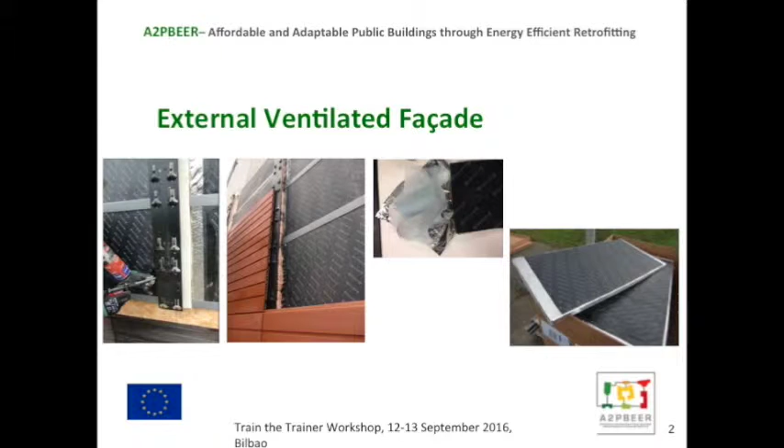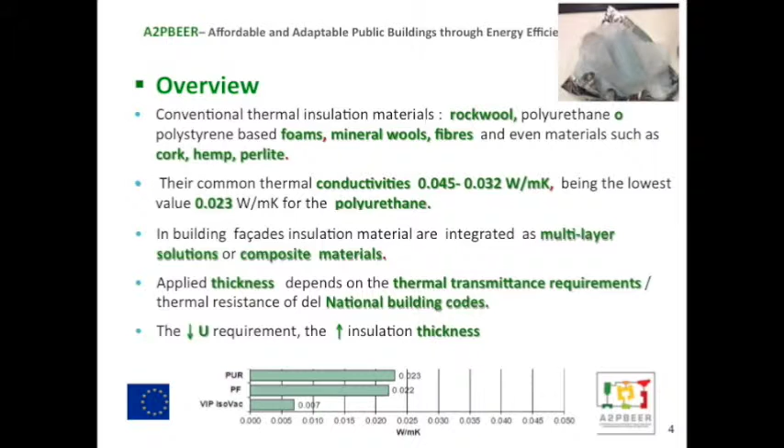So, as you know, there are several conventional insulation materials like rock wool, polyurethane, polystyrene, based on foam, mineral wools, fibers, and even materials such as cork, hemp, and perlite. There are huge materials to insulate your facade. But in this case, the thermal conductivities of these materials are between 0.045 to 0.032 watts per meter per Kelvin. So this material is not so good for the insulation. You need a big thickness to achieve the U value that the Commission is requesting nowadays.

In this graphic, you can see the value of the vacuum insulation panel compared to the rest. So it's a good material to use in the construction sector, but it's true that this material is not very common nowadays. So in order to reduce the U requirements, we need to increase the insulation thickness. And this is one of the challenges of this project, to reduce the thickness of the envelope.

We would like to share with you sentences that we have identified. The vacuum insulation panels can be defined as an evacuated foil-encapsulated open porous material, a high-performance thermal insulating material. This material is 3 to 6 times better than still air. And this vacuum is encapsulated with a microporous material. With this material, we can achieve high thermal resistance with a low thickness. But it's important to take into account also the cost of the material.

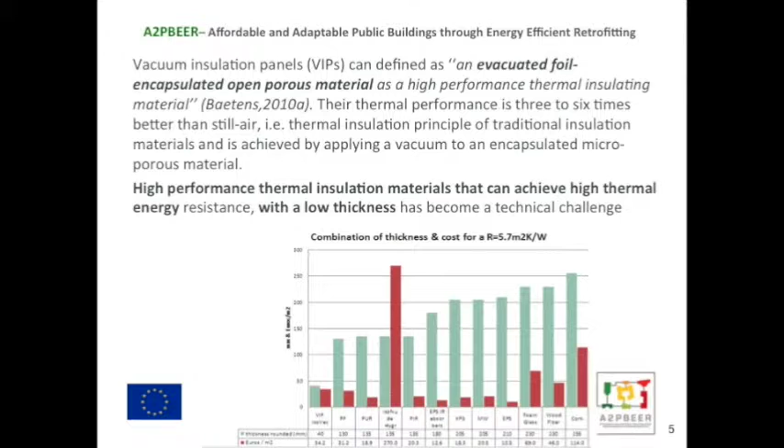So in this graphic, we can see the general prices of each of the insulation materials related to the thickness. So in the first, we can see the vacuum insulation panels. We don't have lists. No, okay, no problem. We can see in the first column the vacuum insulation panels, which is one of the most promising insulations for retrofitting.

So why have we developed these technologies and why do we want to reduce the thickness? Because with the approval of the EPBD recast by the Commission, the thickness of the insulation has almost doubled. So nowadays we have more strict requirements for the U value of the wall. So in this table, you have more or less the different U values of different countries, and the U values are between 0.18 and 0.4. So we need a good insulation to achieve these values.

This is the reason we selected the vacuum insulation panels as the best solution to retrofit buildings by the external facade or by the internal facade. And for example, in this table, you can see different thicknesses using different insulation: rock wool, EPS, super insulation, and vacuum insulation panels. So with the vacuum insulation panels, with 4 centimeters of this material, we achieve a U value of 0.16.

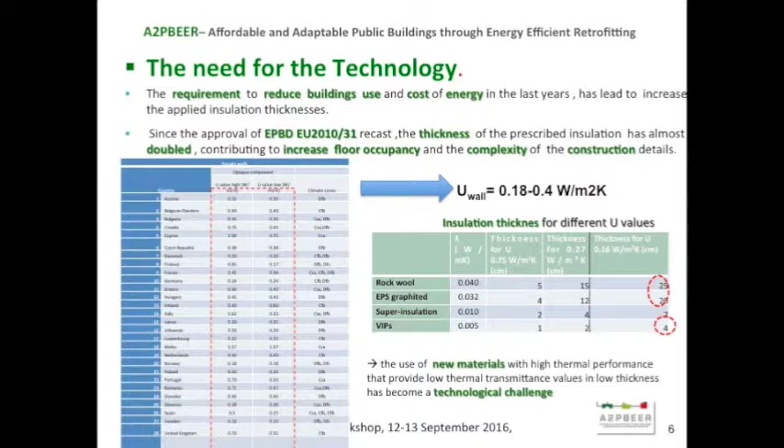Because nowadays the price of, for example, rock wool is more competitive, but you have to take into account not only the first investment. You have to take into account other kinds of things, the space that you save with this kind of solution. So for us, the use of this technology and material is a challenge. So we have achieved this challenge, and we think that we achieved the scope of the project.

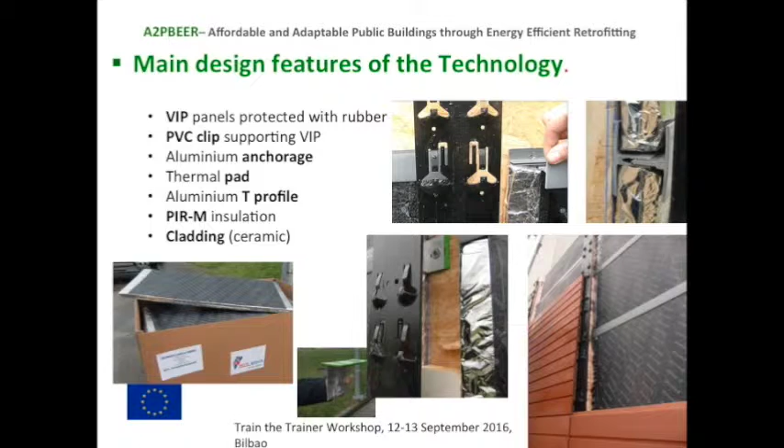The main design features of these technologies is a summary of the different components of the external facade. We have the VIP panels protected by rubber, because although all the components are commercially available, we have to improve all of them. The VIPs have been improved with this rubber. A new development by Bergamo, the PVC clips to support the vacuum insulation panels. We have the aluminium anchorage, thermal pad, aluminium T-profile, PIR insulation, and claddings.

So with these solutions, we can achieve a U value, as I said before, of 0.276, including, I don't remember the name, but the linear thermal transmittance of the linear thermal bridges and the punctual thermal transmittance of the 3D thermal bridges. I mean, in the construction wall, sometimes when you calculate the U value, people don't take into account the linear thermal transmittance and the punctual thermal transmittance. But in this project, we have taken into account everything. So this value could be better if you calculate without these kinds of thermal bridges.

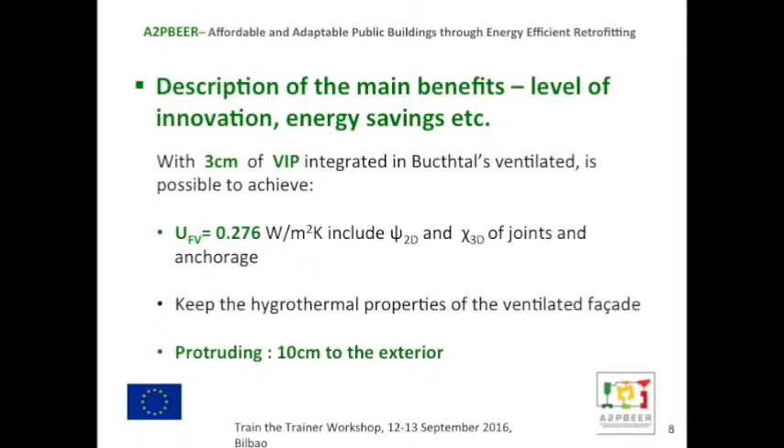We have kept the hygrothermal properties of the ventilated facade, and the final solution protrudes only 10 centimeters to the exterior. So the thickness of the total facade is not very big. So it's not a problem; for example, there are some streets with problems if you increase the facade by 20 or 30 centimeters. So with this solution, we can solve many problems.

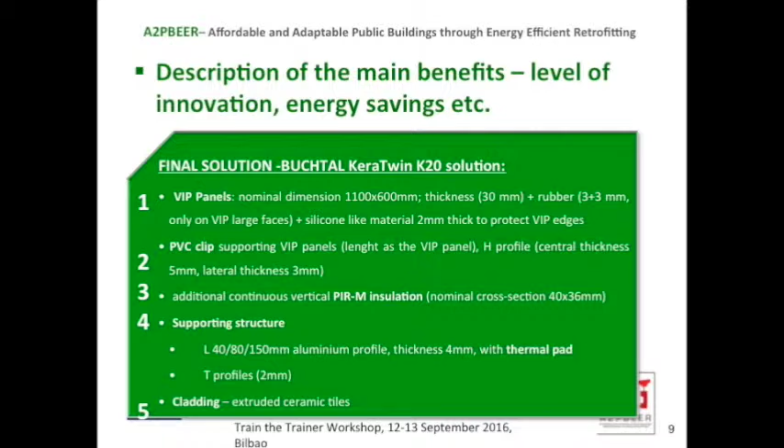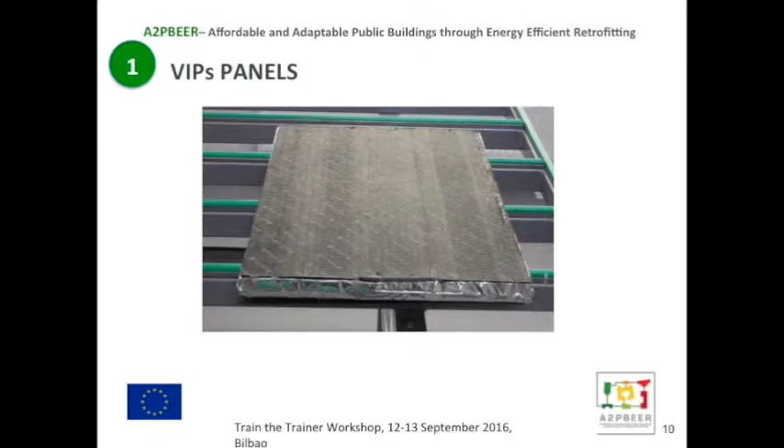So we have 5 components: the VIP panels with these dimensions, thickness, and protection, the PVC clips, the additional insulation material, because in some parts of the facade it's more cost effective to use the PIR material than the insulation, the supporting structure, aluminum profiles and T profiles, and the cladding. You can see the VIP panels with the rubber protection. The PVC clips.

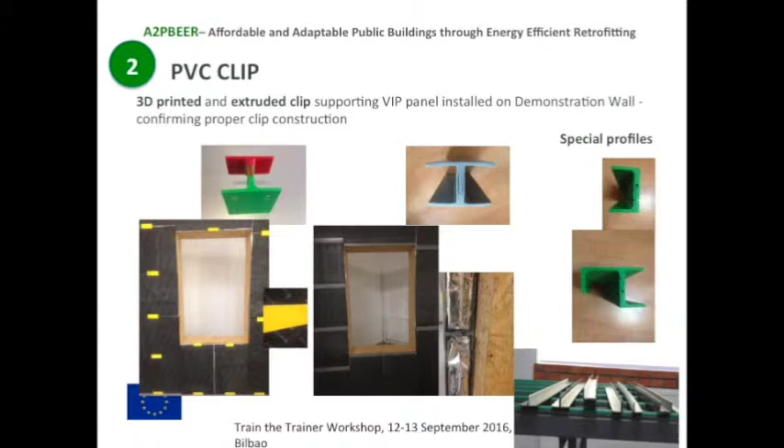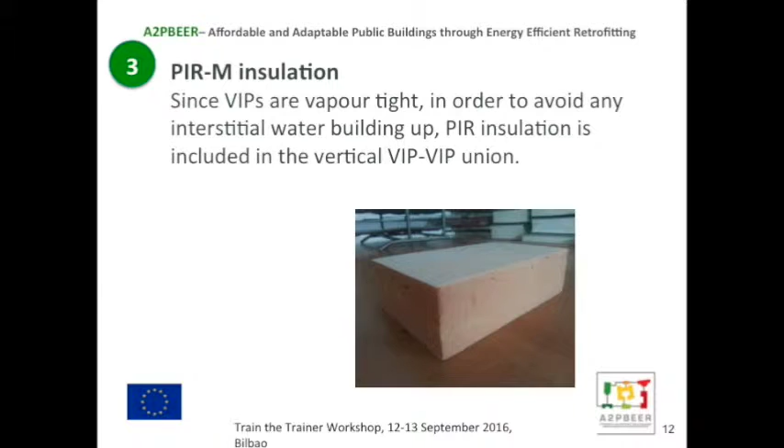The clips are 3D printed and extruded clips to support vacuum insulation panels on the demonstration wall, and Bergamo has developed different types of clips until achieving the best one. So now the clip has been improved, and now it is a good one. At the beginning we had some problems to support because of the wind and so on, and this is the reason we have installed the facade in a cubicle to test the mechanical condition of the whole facade, and to prove each element in real conditions before installing the final solution into the real demo buildings.

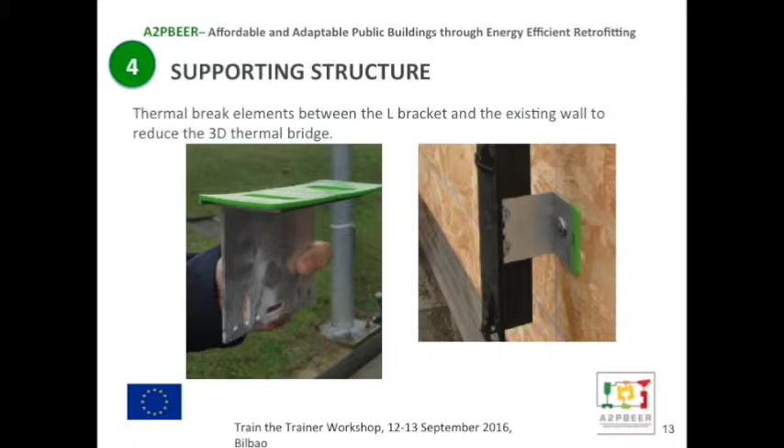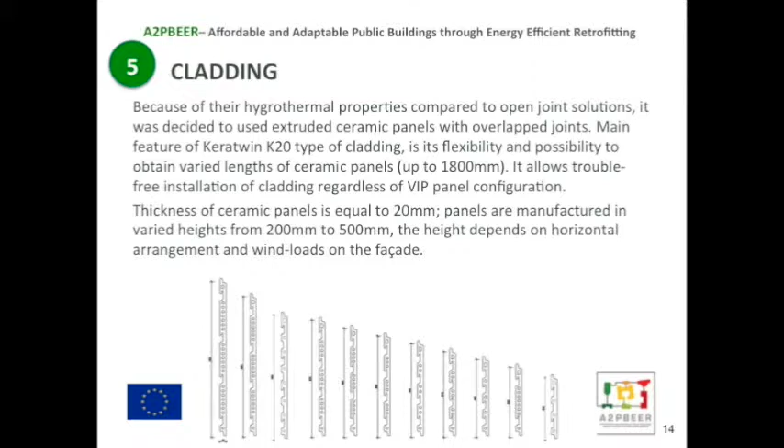The PIR insulation, we use this insulation in the vertical unions between VIP and VIP. We will see it in the prototype installation and also in the cubicle. Supporting structure. The green area is the protecting area, the thermal pad that we have mentioned before. And the last component is the cladding. In this case, because of their hygrothermal properties compared to open joint solutions, we decided to use extruded ceramic panels with overlap joints. This solution is very flexible, and we can select different dimensions to apply in different buildings, and also you can select different colors for different buildings.

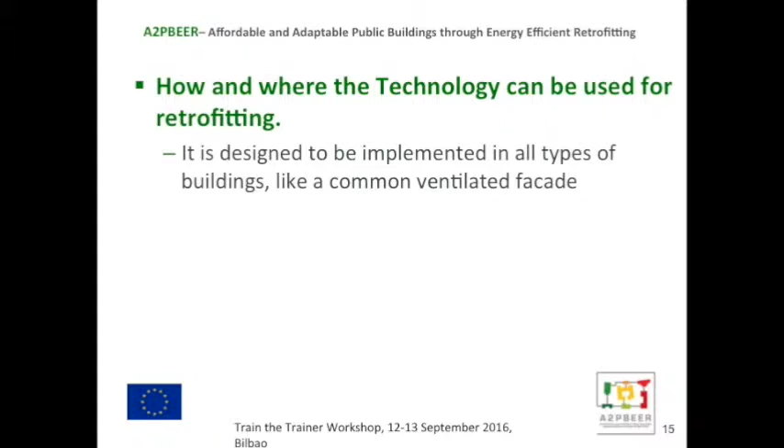One of the questions that we will answer is the applicability of these solutions. From our point of view, it is designed to be implemented in all types of buildings, like a common ventilated facade. So it's not a critical point. It's true that for historic buildings, the solution cannot be applied, but for this kind of building, we have the other

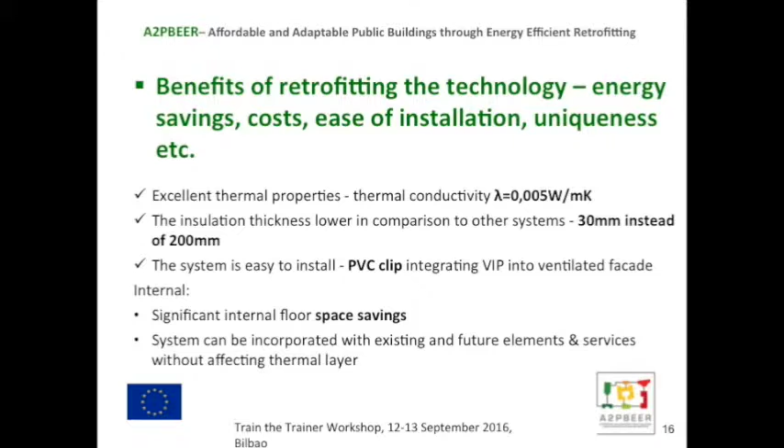the next technology, the insulation, the internal facade solution, and the thermal conductivity. Well, as I said before, the benefit of this solution is a very high performance. The system is very easy to install. You can save floor space in the building, and the system can be incorporated with existing and future elements.

We are not going to explain in depth all the evaluation that we have developed in the frame of the project, but we would like to share with you the different performance that we have verified. We have verified thermal performance, one-dimensional U value according to this regulation, 2 and 3 dimensional U value when considering multidimensional heat transfer, the solar heat gain coefficient. These points are related to thermal performance. Then we have developed condensation performance, which was one of the critical points of the vacuum insulation panel, the condensation and interstitial condensation.

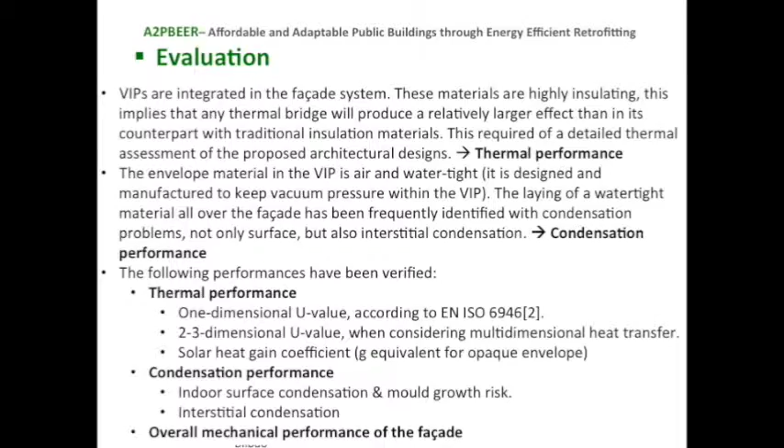So we have developed evaluation related to indoor surface condensation and mold growth risk, and also interstitial condensation. And finally, of course, we developed the overall mechanical performance of the facade. And once all the results of these points were satisfactory, we followed with the real demo sites. So it's a continuous process to improve these solutions.

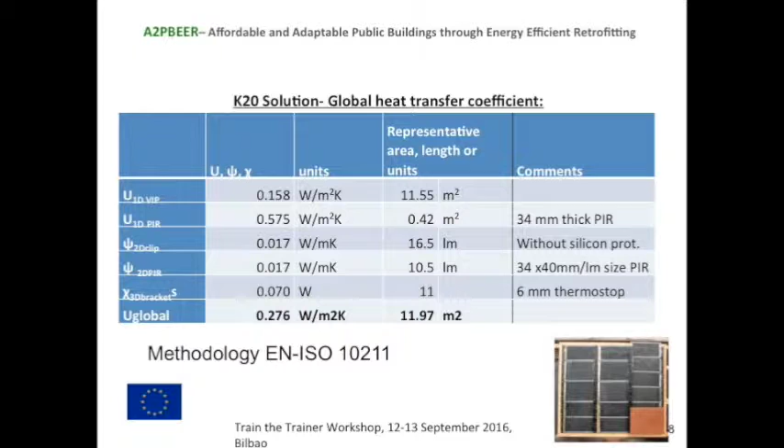It's another comparison to achieve the U global. As I mentioned before, we have taken into account linear thermal transmittance and punctual thermal transmittance, and finally we have the U global of the facade. No condensations,